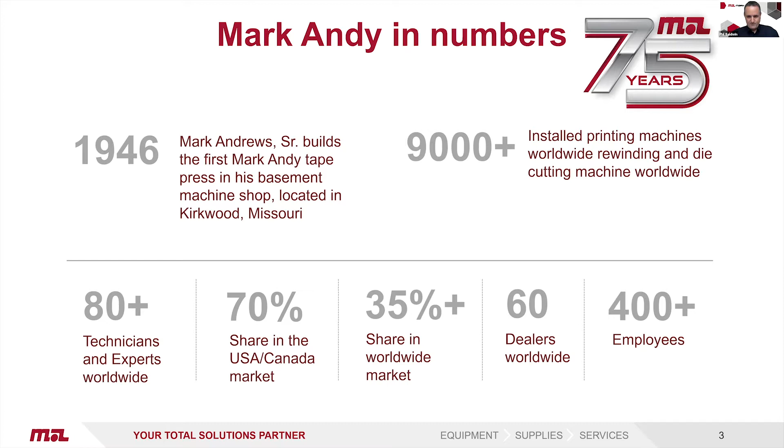We have more than 9,000 presses installed globally. So that's out there in the field running that Mark Andy supports day to day. We have more than 80 directly employed technicians and experts worldwide. In America and Canada, Mark Andy has over 70% of the market share. Globally, we have 35% of the market share, which makes us probably the largest install base throughout Europe and the rest of the world. We have more than 60 dealers worldwide who also have direct engineers to help support the press in the field. And globally as a company, Mark Andy has over 400 employees.

So Mark Andy isn't just a press manufacturer. We like to be known as a total solutions provider. So whether it's the front end, the press, all the way through to finishing, Mark Andy has something to help you. So with this, we have Mark Andy Print Products, which was founded in 2013. This is to offer a complete line of flexo and offset supplies and consumables, such as plate mounting tape, wash up, gloves, cloths, everything you need for your print shop.

When it comes to the finishing side, Mark Andy own Rotoflex. They were established in 1973. Rotoflex have the largest global install base of slitter rewinders. As part of Mark Andy, we can offer this as a package, so you can buy your press and your finishing equipment from us. We also own a company called Presstek. They make the offset DI presses. These are very popular. They're digital imaging sheet-fed offset machines for short run. And then in 2018, we also bought Kluge for the hot stamping, the box making, offline finishing as well for the offset market.

So our vision statement: Mark Andy will be the supplier of choice throughout the entire product lifecycle, offering high quality, innovative solutions that drive our customers' profitability. So we will ensure our customers enjoy doing business with Mark Andy and its associated brands, and want to continue doing business with us in the future. We partner with our customers and provide solutions throughout the product's lifetime. So we're not just a supplier, we like to become our customer's partner in business.

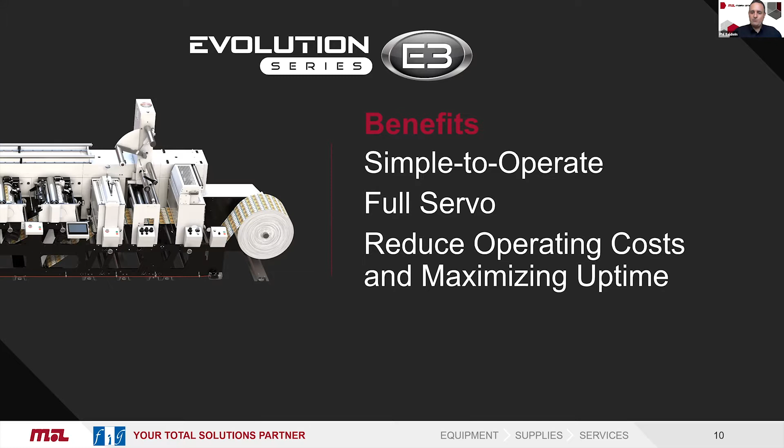So some of the market trends we see: shorter runs. Customers having more variations, different designs, and shorter runs because they don't want to buy hundreds of thousands of a single product when ideally they only need 20,000. So it's market demand for shorter runs but at lower cost. Higher quality labels, so it needs advanced technology, improved registration, improved impression settings and web transport.

And then skilled operators. We're seeing in the market there's less and less skilled operators. So you really need to de-skill the presses, i.e. simplify the presses for ease of use, so you don't necessarily need a more expensive, highly experienced operator or printer to operate these machines.

So with the Evolution, your average waste setup is around 75 feet. For a complete job setup, an 8-color job, you're talking about 20 minutes. It's around 5 minutes to set up the die. This is thanks to the full servo technology, so you have full 360-degree registration. On average, the number of 100,000 label jobs you'd be looking at is about 3,645, and the estimated annual profit margin is around 1.3 million. So that will give you a return on your investment in a very short period of time.

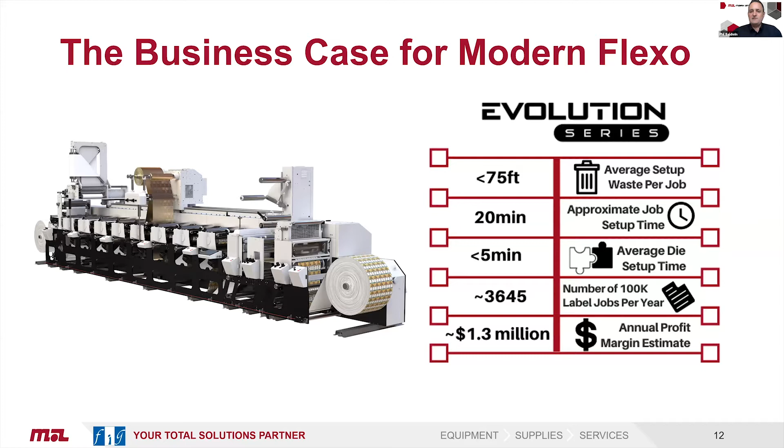Quick overview of the E3. This is the press you see here. Reliable and consistent impression, thanks to the design of the print head with the disc gauge bearer design. So whether it's the operator in the morning or the operator in the afternoon, there should be no variation in the impression. So again, it's de-skilling the press to make it easier to use and more consistent for the operator and owner.

Full servo technology, so whether it's the unwind or the rewind, it's total full servo. Rapid changeovers, it takes about 30 seconds to change over your print cylinders. And then robust converting, the solid platforms. This can be seen from the machines we have out in the field, which are 10, 15, 20 years old.

The higher quality comes from reliable, consistent impression settings with independent impression and inking adjustments, so one adjustment will not affect the other.

Tighter registration control utilizing servo-controlled in-feed and exit, along with an independent plate roll drive, means we can change the speed of the plate roll thanks to the print stations having 2 servos. We also use an Oldham coupling drive - rather than a pin drive system where a pin goes against a pin, which over time wears and decreases register tolerance, we use a male and female slot called an Oldham drive. This prevents wear and increases registration, taking tolerance from an average machine of 5 to 6 thou down to about 4 thou - probably the best registration tolerance on the market.

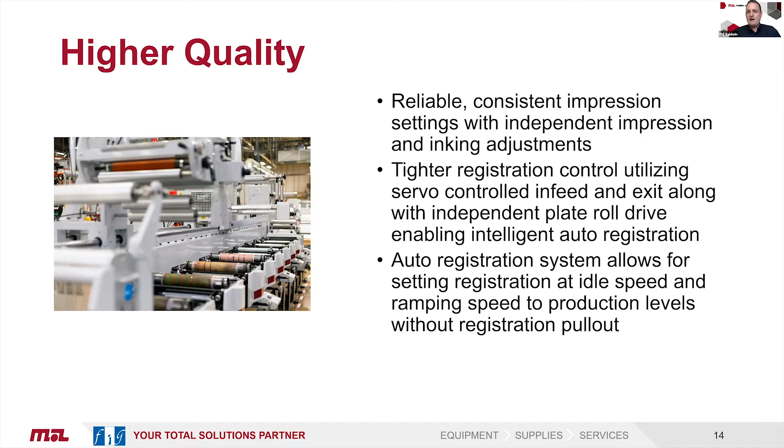We have a new improved web transport system - full servo in-feed and exit, using 24-inch in-feed and exit pacing rollers. This eliminates the registration movement you'd see on a normal label press, which only has 8 or 12-inch in-feed impression rolls. The auto registration system allows setting up register at idle speed, then ramping up to production speed without seeing registration pull out, thanks to this improved system.

We have an enhanced pre-registration system that automatically puts the plates in position with the first print down. This will be as accurate as your plate mounting.

Fast impression adjustments during material changes with completely independent material impression adjustment means any movement of the plate won't upset the web transport, which can cause misregistration on the units following the one you've adjusted. The load and lock inking system gives 30-second changeovers, and servo controlled die stations with auto register ensure your die station stays in register throughout production at faster speeds.

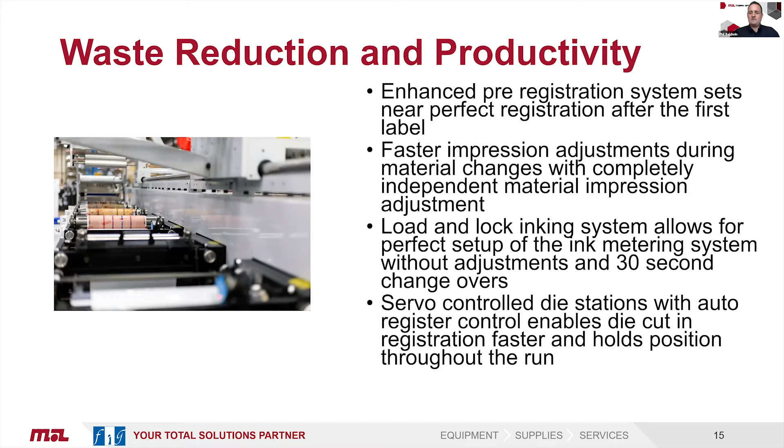So really the roundup is the E3 is full servo technology, extremely easy to use. You have reliable impression and die cutting, rock solid registration thanks to the Oldham drive and improved web transport, and much faster changeovers than other presses. The machine also features a new UV system called Pro UV.

It's a very energy efficient system compared to other UV systems or older systems on the market, with the power supplies having a power factor of up to 94%. Older systems are most likely around 60 to 70%, and more modern systems are probably still only in the 80s, so 94% power factor is extremely high.

It has fully adaptive ventilation control, allowing for greater temperature variance to keep the lamps at optimal temperature in every environment. Some systems can suffer if they're in hotter countries, for example India, but thanks to the Pro UV system and its controls, it controls the temperature depending on its environment - so it's suited to extreme environments, unlike other systems.

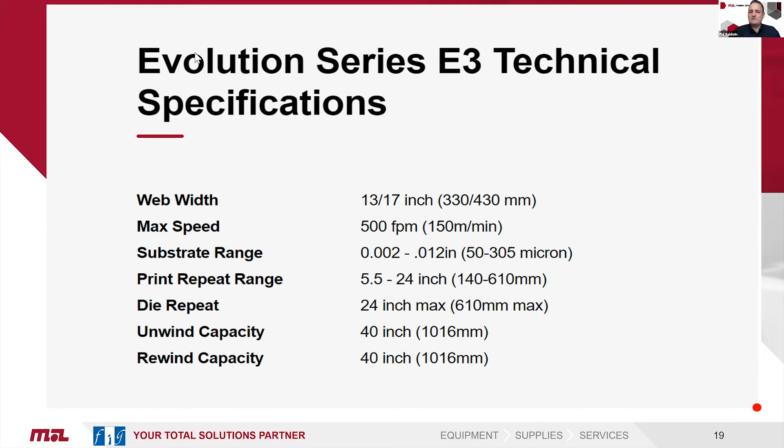Could you give Lucas a... Yeah, I will check what is going on. I am sorry, I am okay. Here, good, sorry, I was muted.

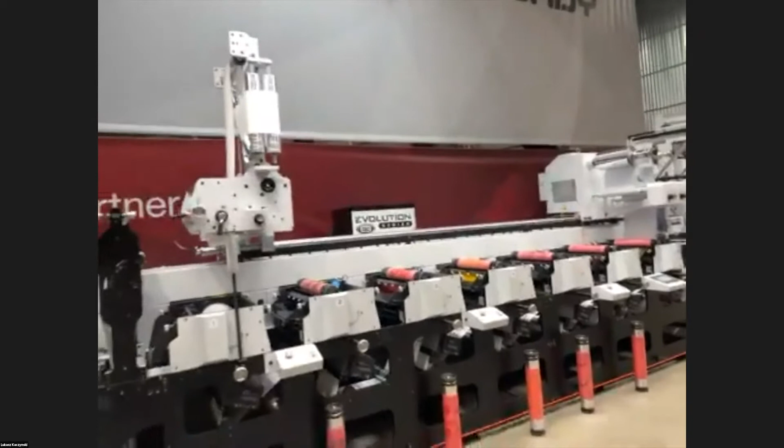This is how the machine looks. It looks very similar to the Performance series, and it's also built the same way, more or less. So we are starting with the unwinder.

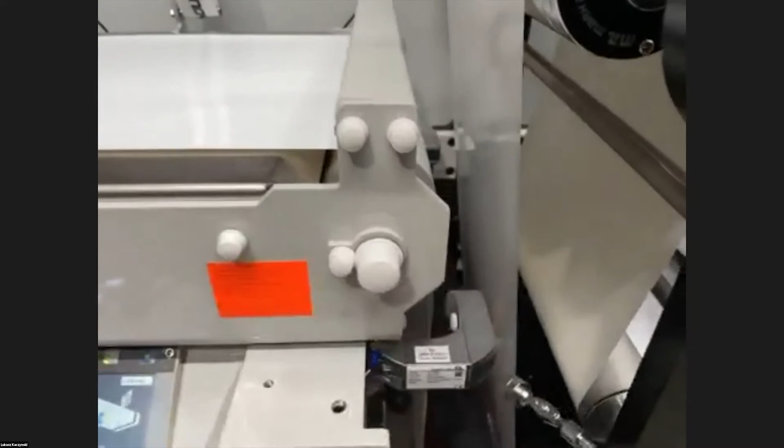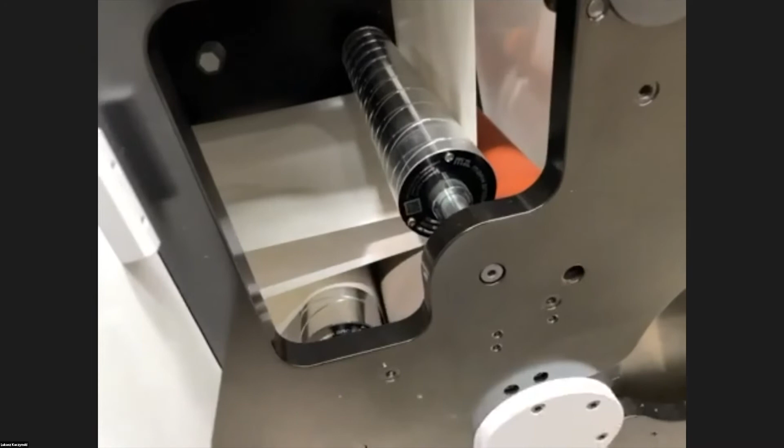We have a splice table and ultrasonic web guide, with sensors from two sides. We have in-feed pacing, which is servo driven. We've got a big pacing roll and one rubber nip roll. This pacing roll is the same diameter as the impression cylinder in the printing stations, which is why we're able to hold very good web tension in the machine, and because of that, the registration holds really well.

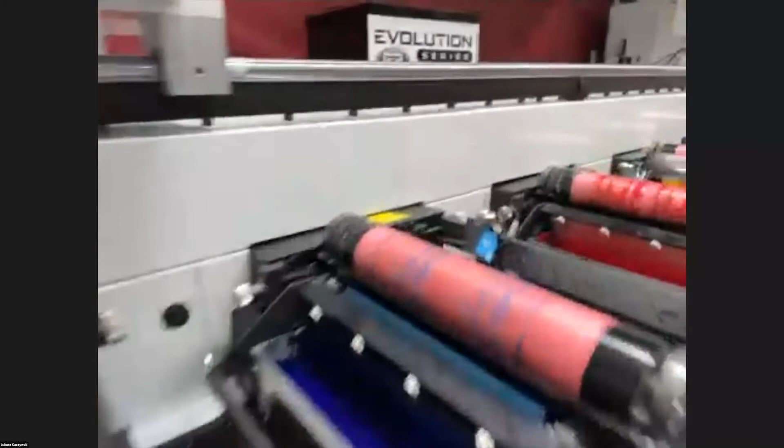What's very important in this machine is that we don't have any shaft. It's all servo driven, and we have two servo motors in each print station. One servo motor drives the impression cylinder, and the second one drives the print cylinder. Maybe later on I can show you how it looks on the backside of the machine.

Over here we have a delamination module. So when we want to print on the glue side, we split the face and liner. The liner goes up, the face goes to the print station. We print one color on the glue side, and then it goes to the relamination module, and we have a web turning bar.

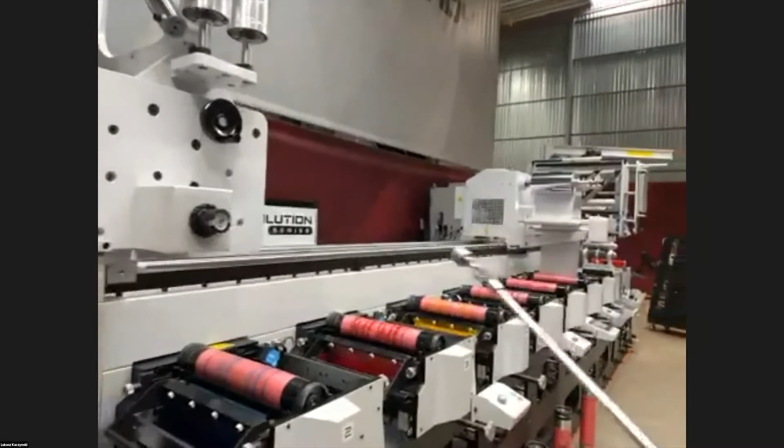What's very important to add is that we have a rail system through the whole machine, so we can easily move all the equipment on the rail. We can move the web turning bar to other print stations or a cold foiling unit. We can also have a laminator on the rail, or in this case, a peel-off module. So everything is on the rail.

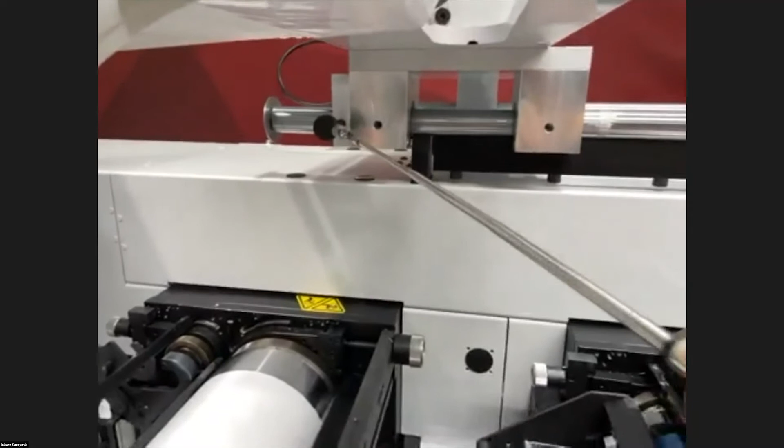A small difference from the Performance series is that the locking knob is in the front, on the operator side, so the operator doesn't have to go to the rear side of the machine anymore.

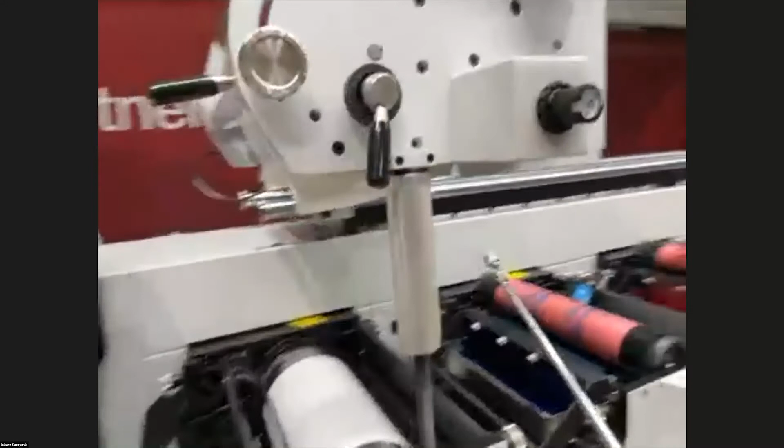We also have a support bar for all the equipment, which has two functions. It supports the web turning bar, but also, for some substrates, you need to change the level of the web turning bar a little bit. You can easily do this with this screw, and then it goes a little bit up or down.

E3 is available in a configuration of 4 print stations or 8 print stations only. This machine has 8 colors and is 330 millimeters wide, which is 13 inches.

The print head is exactly the same as the Performance series. So we have the ink tray with meter roll, the doctor blade, the Anilox roll, the plate cylinder with the plate, and the impression cylinder.

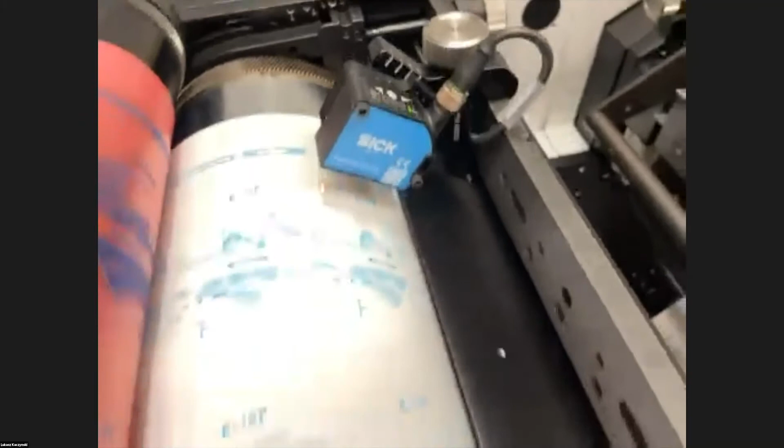All the colors work in automatic register. Over here we've got a sensor reading the master mark from the first print station, the master station. And over here we've got the pre-registration sensor, you can see the red light. So when all the plates are mounted the same way, the same position, and we're setting up a new job, you just need to make a small final adjustment and the colors will be in register.

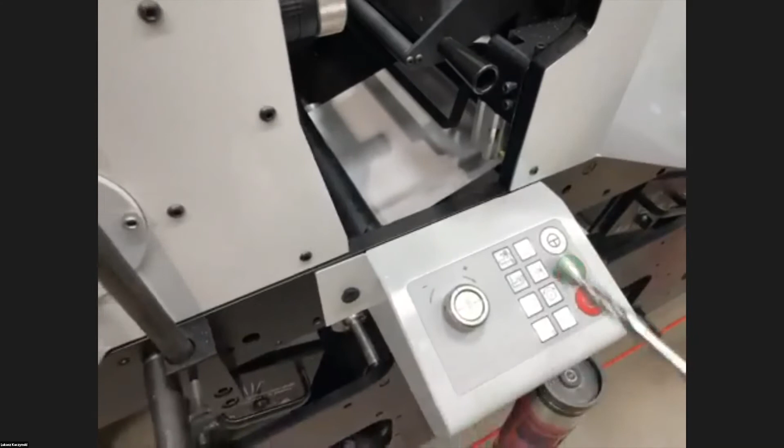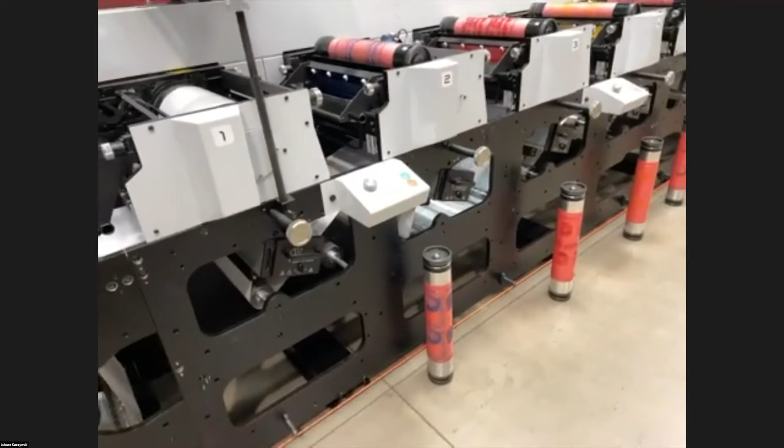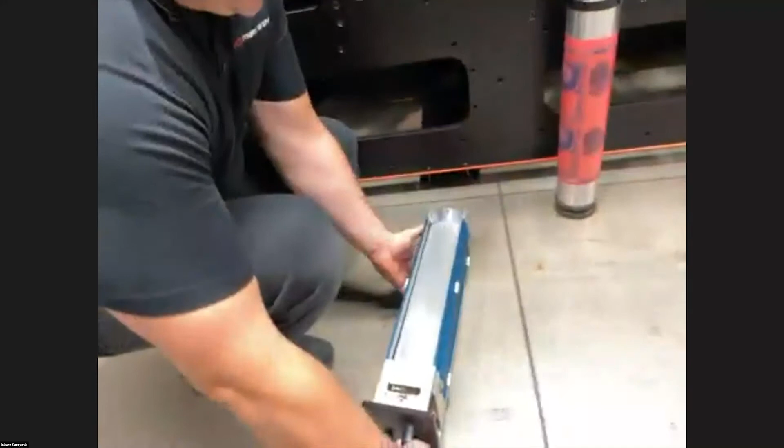In this machine, Evolution E3, we are using the Pro UV system. That's how it looks, one UV cassette, 160 watts per centimeter power. Grzegorz, could you please take one cassette out? So it's very easy to take out, you've got only one knob, you need to turn it, and it's out. Very easy to maintain and clean.

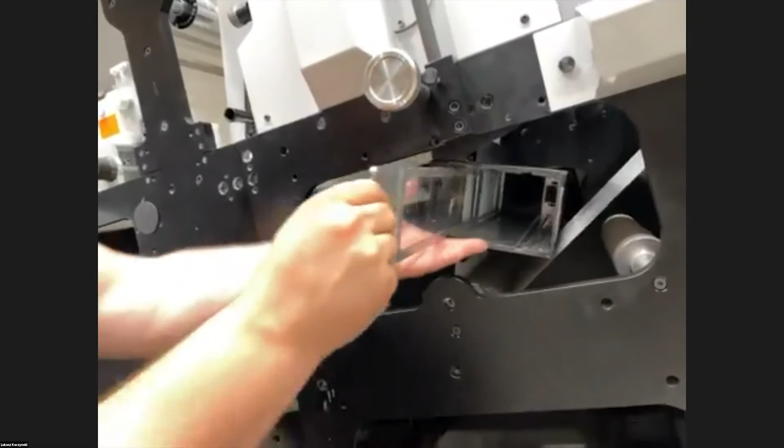It's also very easy to take out the protective glass. The protective glass has two functions: it keeps the bulb clean, and it also limits the heat created by the UV lamp, so you don't get that much heat on your web, on your substrate.

It looks very user-friendly, Lukasz. It is, it really is.

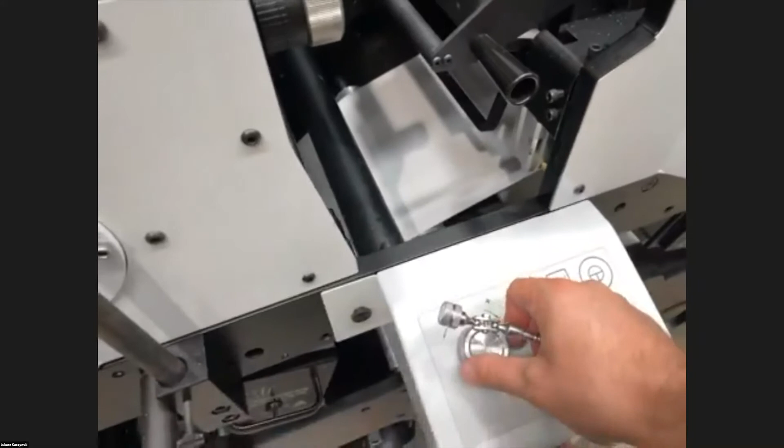This is the registration knob, 360 degrees. If you want to go forward, you turn it to the right. If you want to go backwards, you turn it to the left. And this is the side-to-side registration.

All the print stations look pretty much the same. The only difference is the last print station, which has a longer web path to the UV lamp for better spread out of coatings and varnishes.

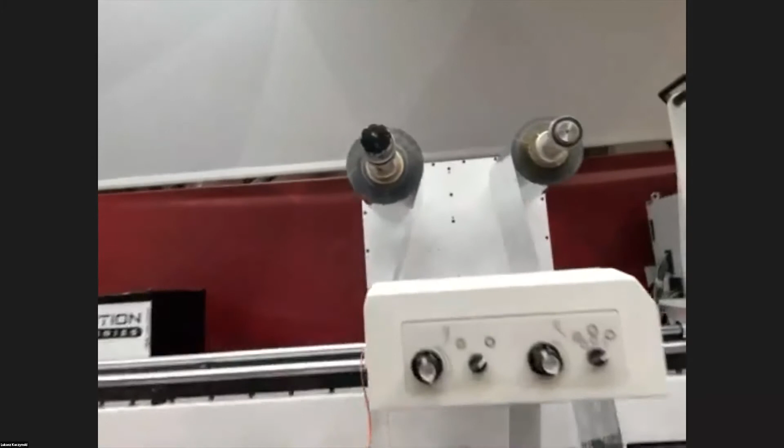Over here we have a cold foil module, unwinder and rewinder, nip roll, very easy to set up and also very quick to move from one print station to another, as you don't need to change or add any idlers.

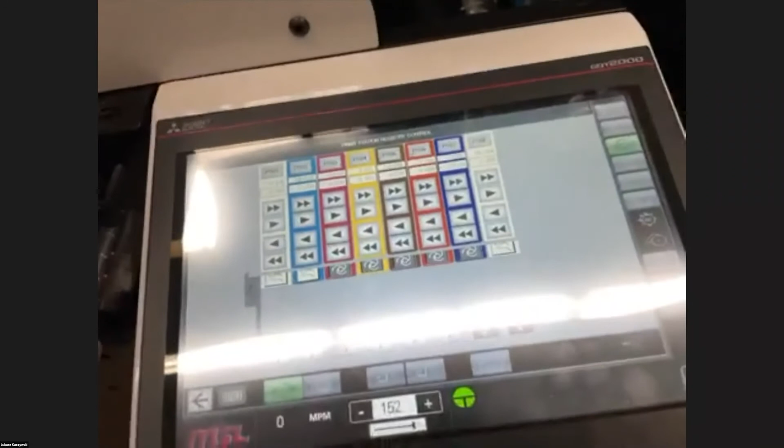This is the main control panel for the operator. You can move the registration backwards and forwards from this screen as well. We also have a vertical die cut slot.

Waste removal and hoist to swap the magnetic cylinders.

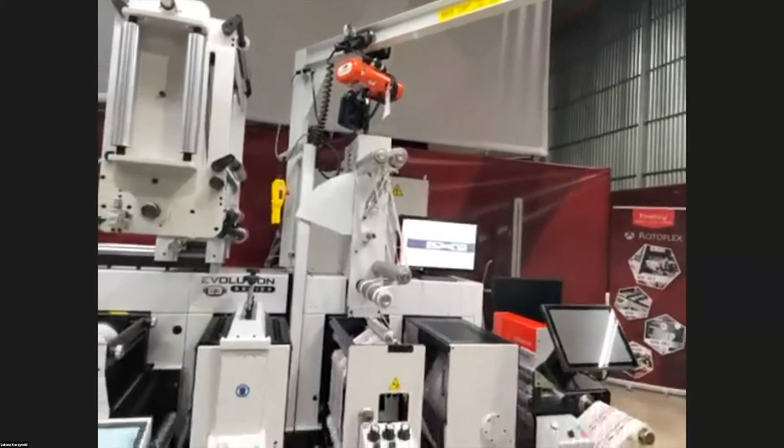Again, we have exit pacing. So one we have in the beginning of the machine, which we call infeed pacing, and over here we've got exit pacing. It's a big pacing roll, servo driven with rubber nip roll, which controls our web tension in the machine.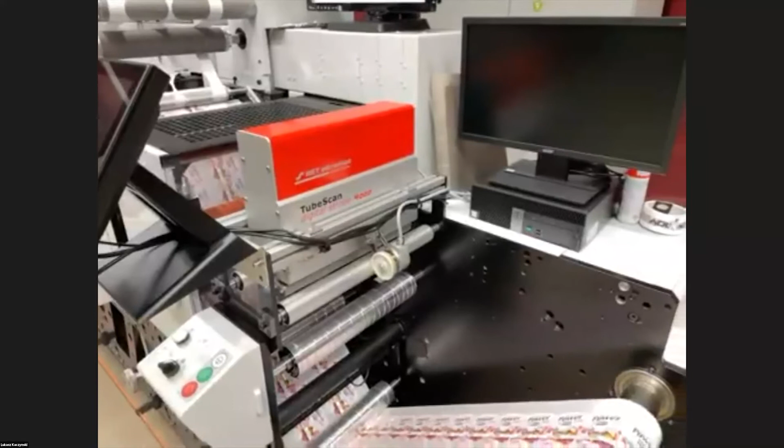Over here we have the BST eltromat 100% inspection camera. We can also add EyeC or AVT, it's up to customer wish what kind of inspection camera we use. At the moment most printing houses are printing labels above 120-140 meters per minute, and with this speed it's impossible to control quality by eye, so most companies, in Europe at least, are installing and investing in inspection cameras.

And over here we have a rewinder. So that's how the machine looks like.

From the front side and on the rear side, it's quite simple and easy. So we have the main power cabinet, we have the UV system extraction, that's the blower basically. We don't have ducting in the demo room, that's why the big black box does the ozone filter.

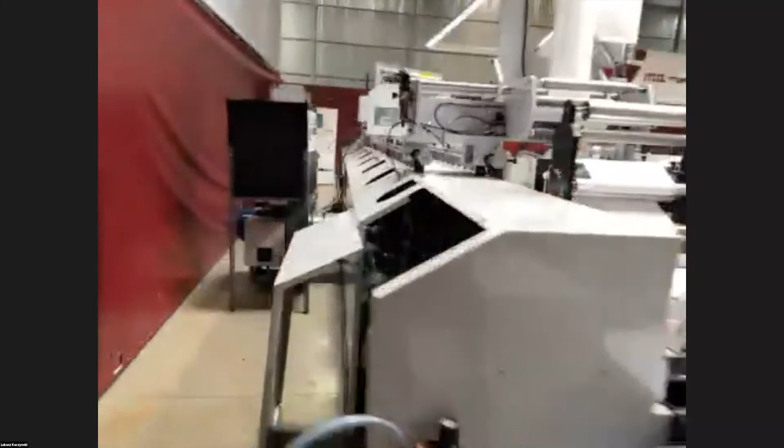Maybe I can show you one print station from the back side, so you can see that we have two servo motors for each station. They're made by Mitsubishi, very reliable, strong servo motors. Over here we have one for the print cylinder, and over here one for the impression cylinder.

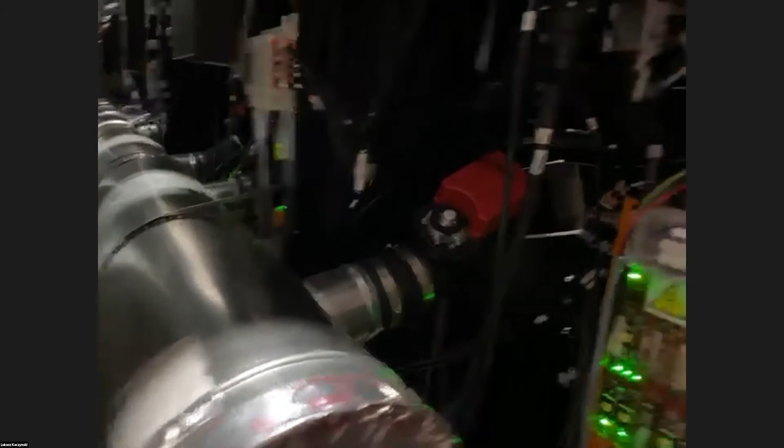This is the integrated power pack for the UV lamp, we have one for two lamps, and this is the ducting system for all of the UV lamps. The machine has been built in quite a simple but robust way, and later on it's very easy to maintain and service this machine.

Okay, do we have any questions, or will we have questions at the end of the demo? I think maybe Lukasz can just talk about the system you have on the rail after the cold foiling unit.

The peel-off module, you mean? Yeah.

Sorry, I couldn't hear you, it's quite noisy in here. So maybe we will have all the questions at the end.

Well, that's fine. I just wanted you to explain this module, because I believe you're not really running a job with the peel-off module, right?

Yes, that's correct, we only have this for testing right now, but it's quite simple and easy to use. So we're webbing the web to the upper side, then it goes to the lower one, you're splitting one web, it goes to the turning bar from here and goes to the turning bar in here, and you're putting two webs on top of each other.

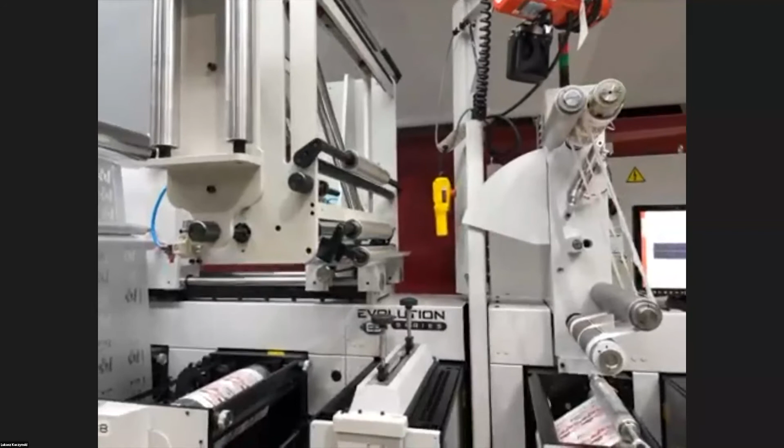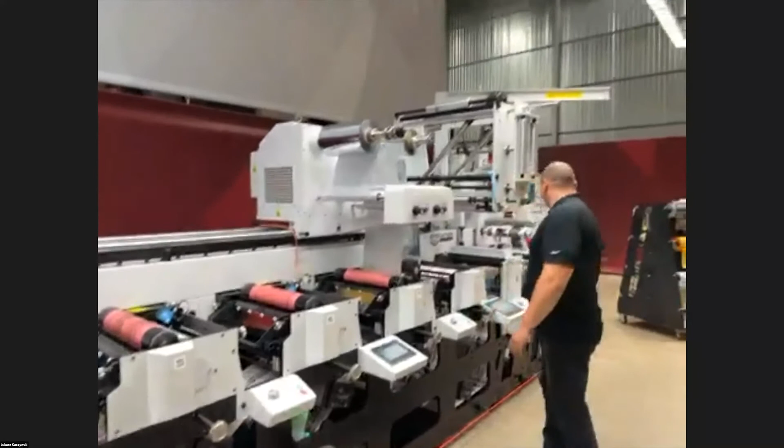Okay, so let's start the demo. For today's demo, Grzegorz prepared two jobs. One job is CMYK plus Pantone plus cold foiling and die cutting. The second one is CMYK plus Pantone and die cutting. So let's see how the machine is running.

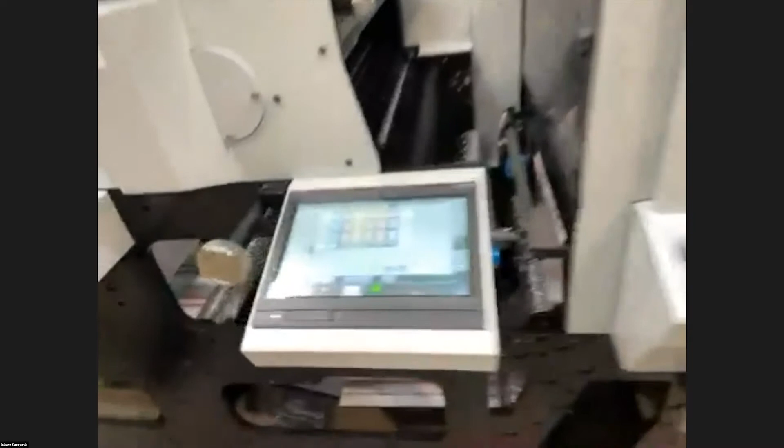We are running at the moment the maximum speed of the machine, which is 152 meters per minute. Let's check the registration. Registration looks very good. Let's adjust a little bit backward.

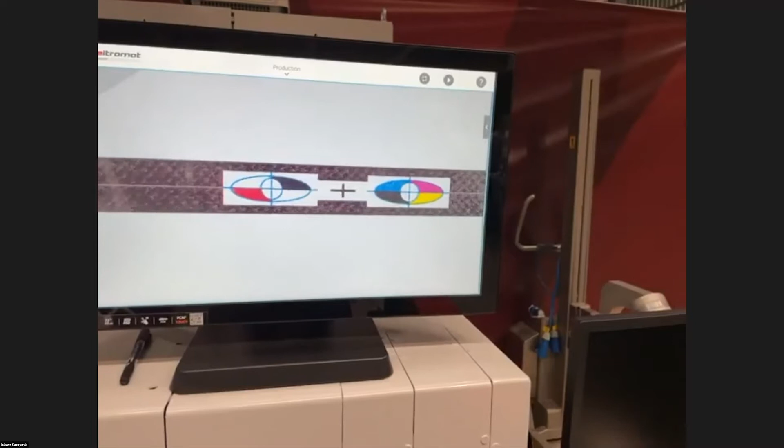I can't see that it's moving at all, and we are running 150 meters per minute.

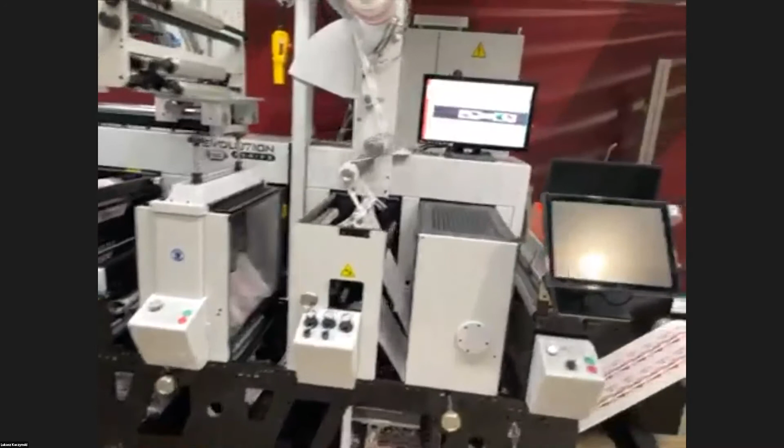So Grzegorz has stopped the machine. Let's start again with the same speed and check if the registration will come back in the same place.

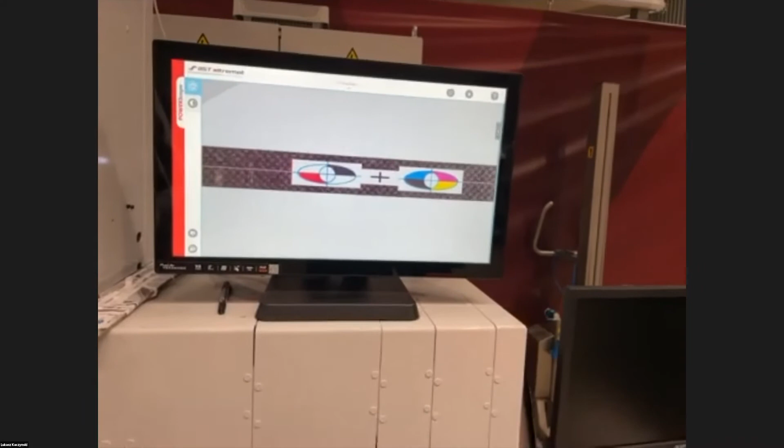So you can see that when the machine starts, the registration was a little bit off, but now it's exactly in the same place. So when you are changing your roll or stopping for one reason or another, you don't need to adjust the registration.

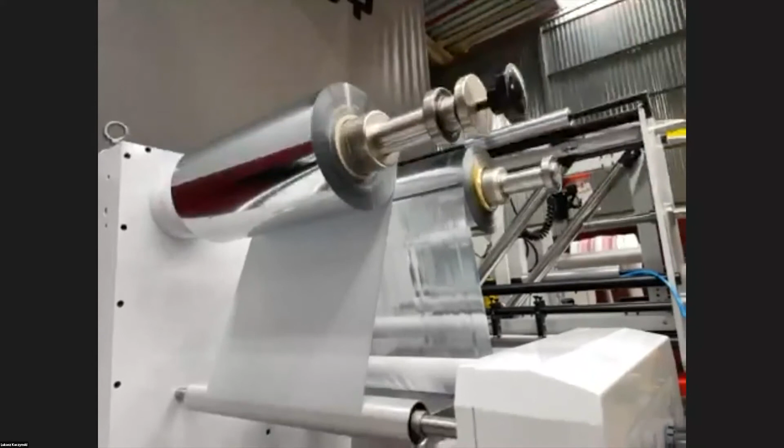So we are printing a master mark on cyan, and all the other color print stations are following the master mark using six sensors in here.

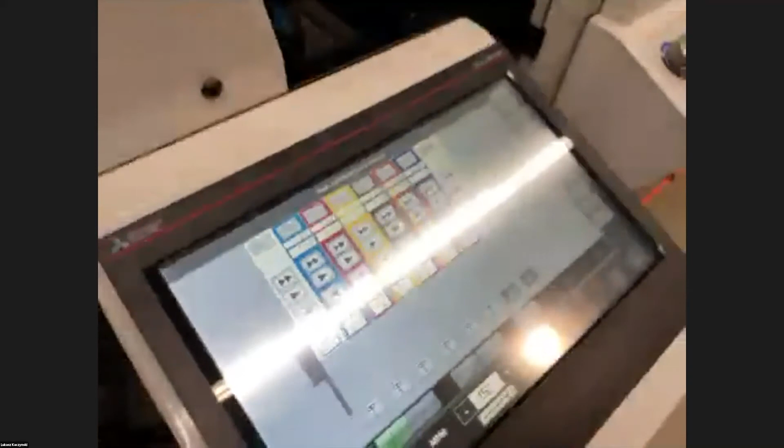Also, maybe we can show manual mode. Let's swap from automatic mode to manual mode in registration and see what happens. So now all the colors are in manual mode. Starting registration as well, good.

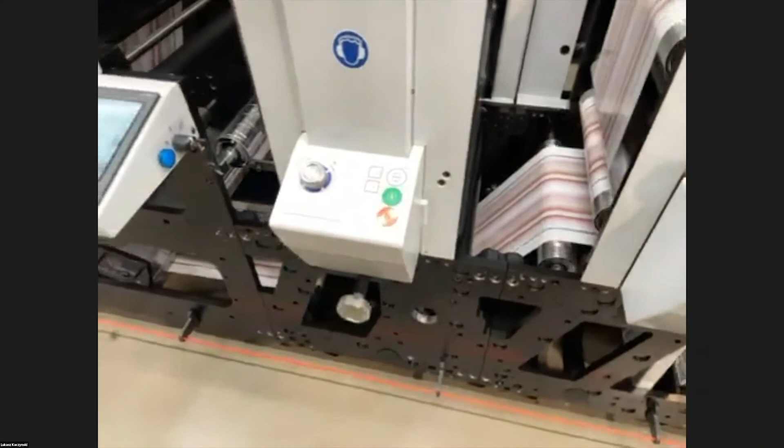So let's start and stop with manual mode. Just to confirm, we have everything in manual, and let's start again and see if the registration will come back.

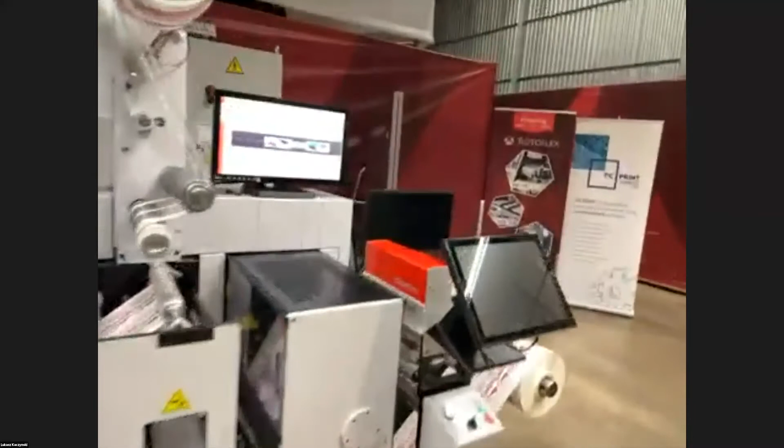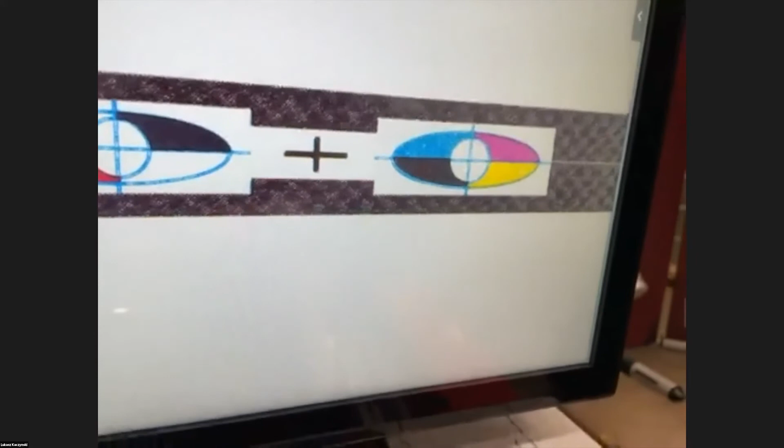Grzegorz was a bit afraid, but even in manual mode, it comes back in the same position. So whether it's manual or automatic register, it's holding registration perfectly. And the substrate in the machine is PP white 50 microns with glassine liner. So let's start changing the job.

So Grzegorz is removing the cold foil, taking out the print cylinder. What's very important is that our machines have very easy access and are operator friendly. So if you want to swap the cylinder, you just need to hit one button, take out the cylinder. You don't have any guards, any covers. You don't need any special tools. Just one button, taking out.

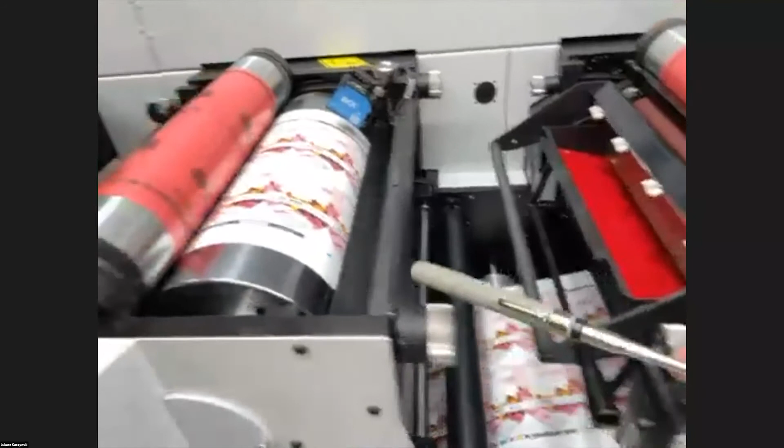Also, when you are changing from one repeat to another, from big cylinders to small cylinders, and you are running similar thickness of the substrate, you don't need to play with the impression adjustments. So over here, we've got knobs for the impression adjustments, but when the substrate has similar thickness, you don't need to change it because of the design of the print head, the print station. So the cylinder is lying here. So it doesn't matter if it's a big cylinder or small, the contact point is always the same.

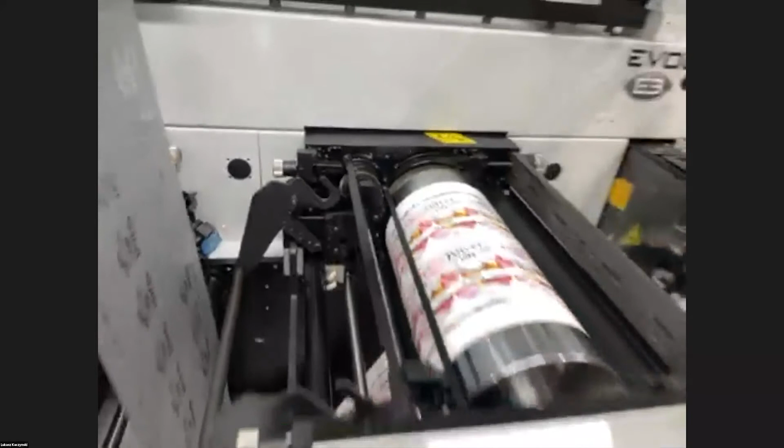Okay, so we are starting another job. Grzegorz just hit the impression knob button on the cyan. We are printing a master mark on cyan, over here. Then this sensor is reading this master mark. Grzegorz hits the pre-register button and it's almost 100% in register. Just a small final adjustment.

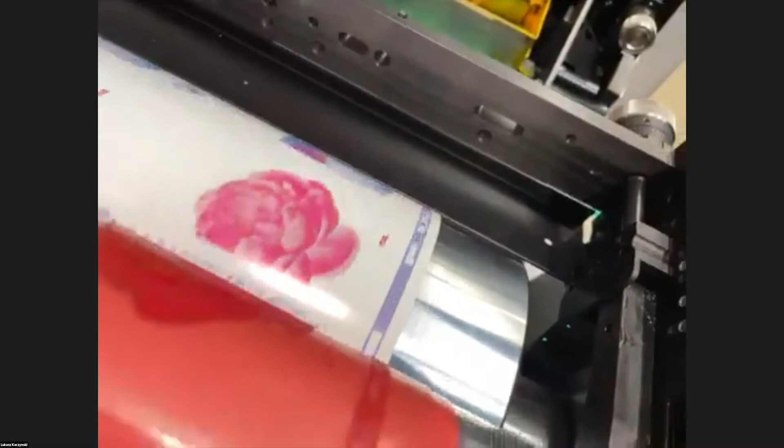Same story with another print station. So reading the mark, hitting the pre-register button, final correction, and moving to the next one. Okay, up to the next one. Okay. Now the die cut.

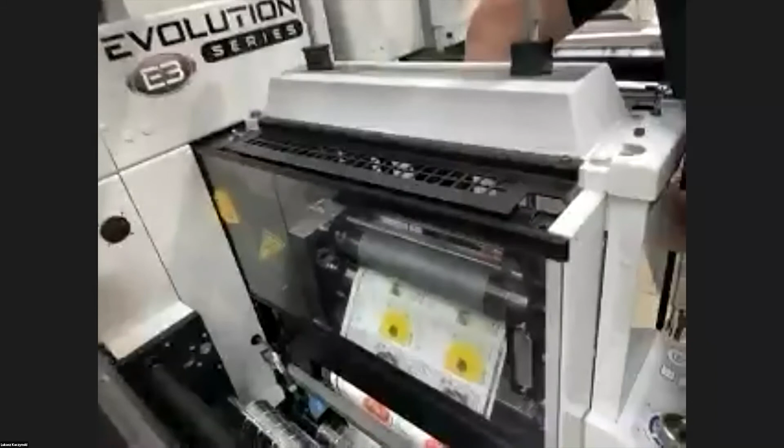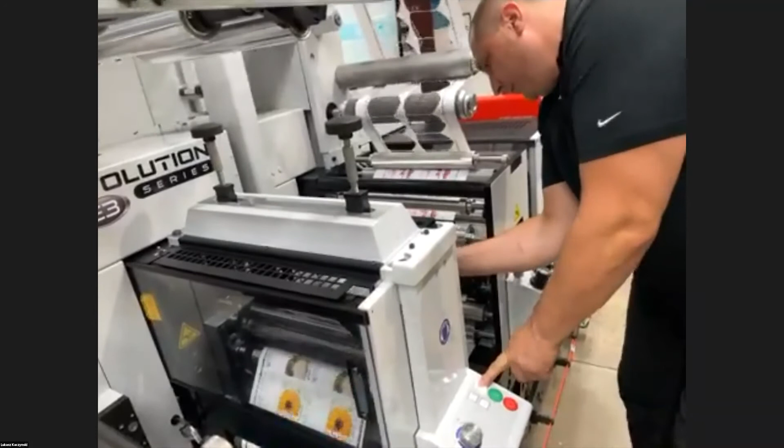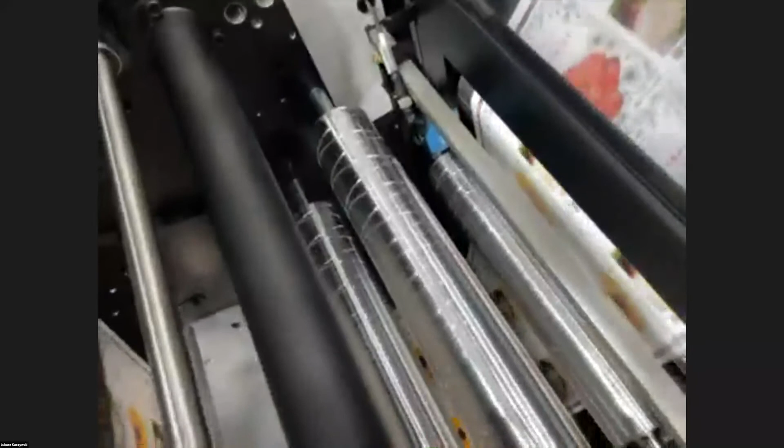Now we will be swapping the flexi dies. Get the flexi die into register. Same story, automatic register, the sensor is over there. We can move it backwards or forward using this knob, or we can change it on the screen.

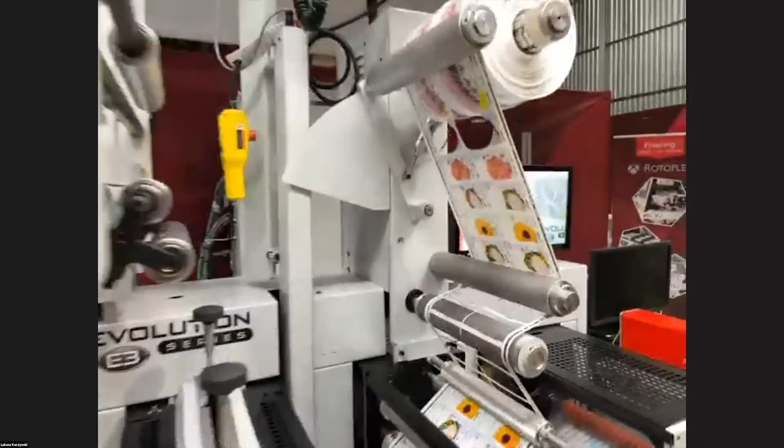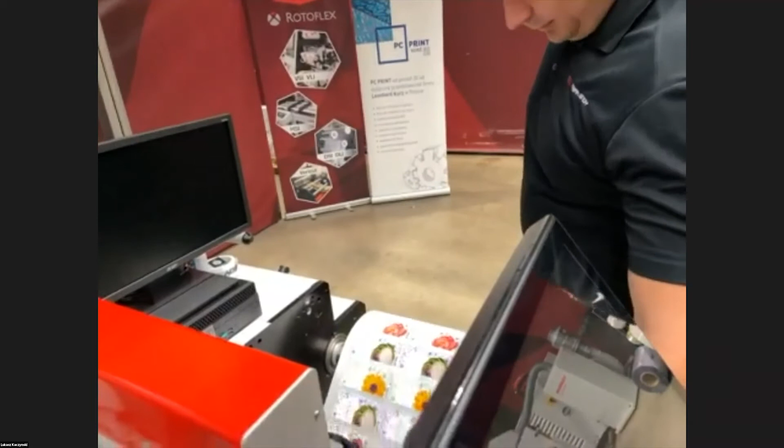So to remove that last job, Lucas, take the whole job off in the cold foil, put the new job on, print to print register and die cut. You're about just under 8 minutes. So that's pretty impressive really for a complete job change. How many minutes, sorry? I said just under 8. I think it's actually closer to about 6 minutes, sorry. Yeah, that's quite normal for this machine.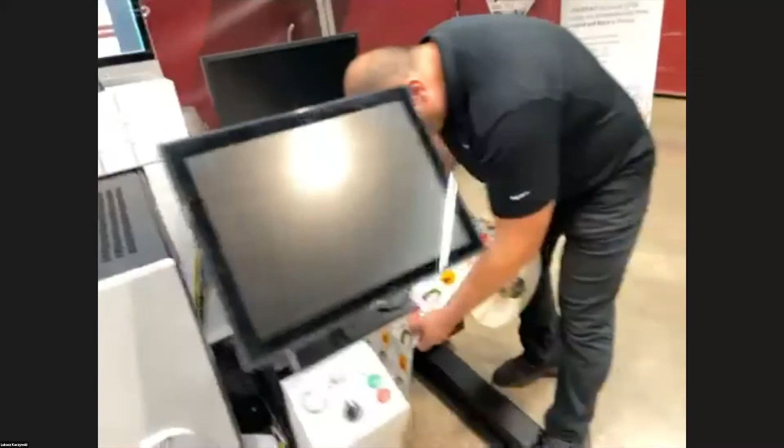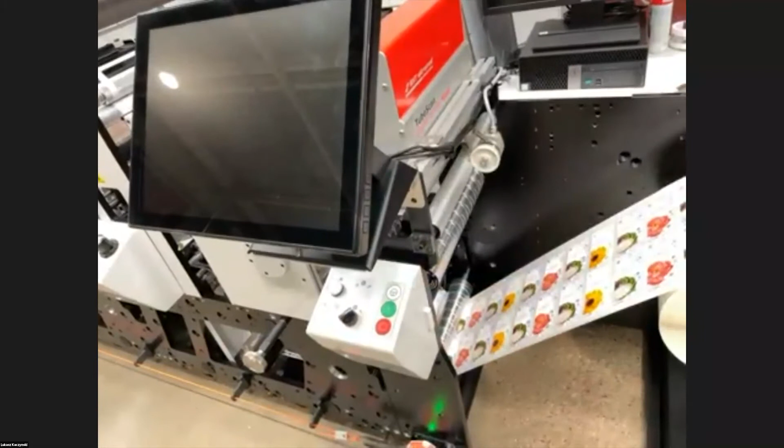Let's check how much waste Grzegorz produced by setting up a new job. So we started to print somewhere in here. Then we set up all the CMYK colors and Pantone and removed the waste. And it's all in register, acceptable to start the production. Can you do it again and make it shorter? Shorter than 1.5 meters might be difficult, but I will ask Grzegorz next time to do this better. Great job. Okay.

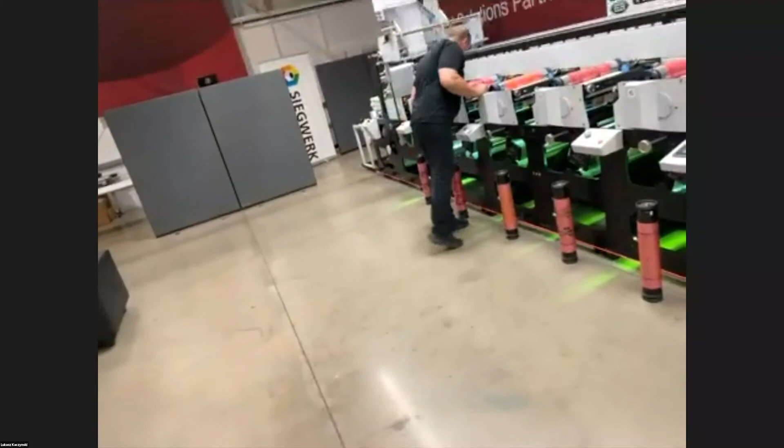Okay, let's come on to the production speed. Production speed for Grzegorz is always the same, 150. Small correction in the registration, side to side. We are running now 70 meters per minute. Now we will run 150.

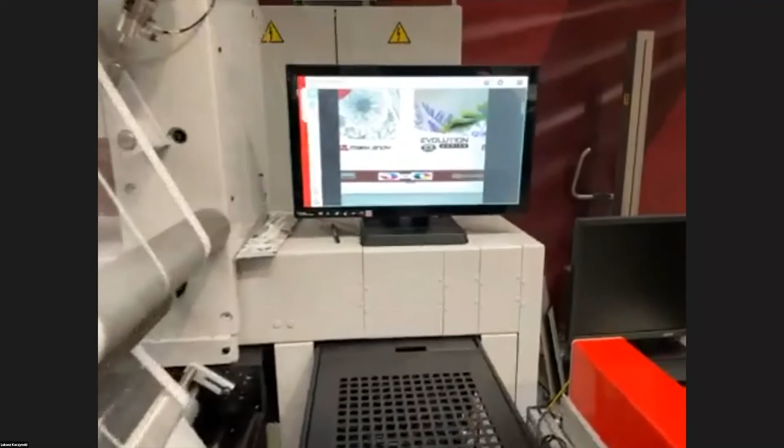How many colors is this job, Lukasz? 5 colors here. CMYK colours and 1 Pantone. So a pretty average label job then. So quite a true reflection. So we are running 150 and register is spot on. Okay, so let's stop for a moment. Really nice. Let's check the label.

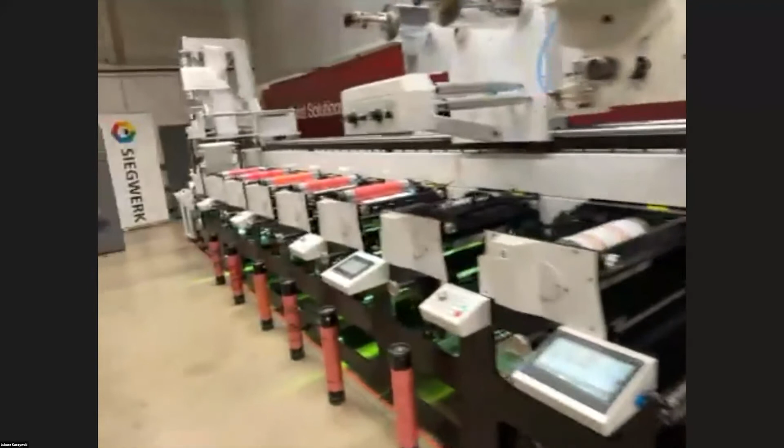Okay, let's start again and check the registration. So normally on a mechanical press, due to web transport, the registration moves completely out. Just one length of the press and register is back on. It's absolutely minimum waste. Stop for a moment.

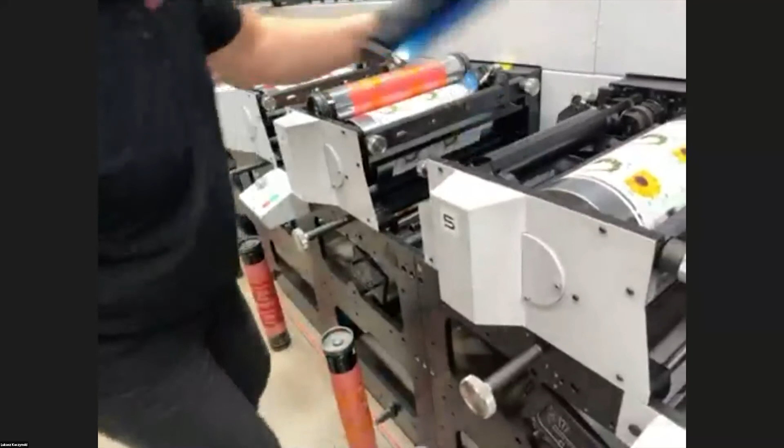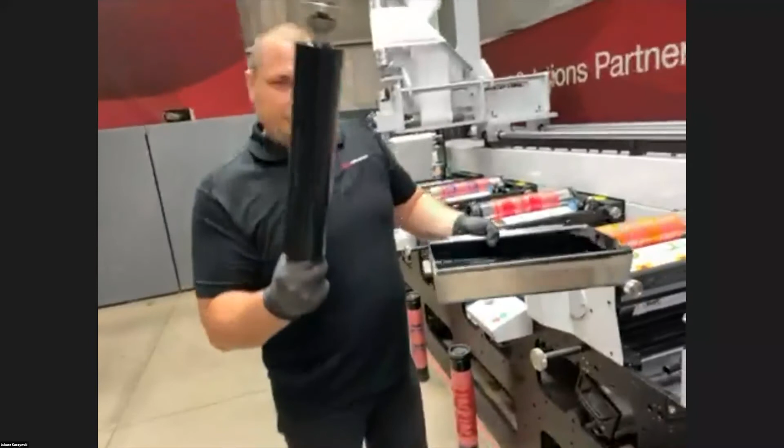Okay. Now we would like to show you how easy and quick it is to change from one color to another. So we'll take everything out of the print station and put it back in. This shouldn't take longer than 30 seconds. So open the print station, take out the print cylinder, take out the doctor blade, anilox roll, and the ink tray. That's all. Print station is ready to print.

Okay, perfect. I think that we answered all questions. Phil, Gaurav, did you receive any questions on private message? So there's actually one: does the machine support the QC-DC? The E3 only actually runs the vertical die slots. It's designed, being a label press, for your longer runs and your longer setups. So your longer runs rather than multiple changeovers, which would require QC-DC.

But as you saw during the video with Gregos, it's actually extremely quick to change over your flexi die, or you could look at having two vertical dies. So you can have one station running and then the other one with your next repeat size already in. So when you stop the machine, you can lift up the first die and then just mount the second die to get going. So changeover time's still very quick on this system. The QC-DC though is available on the E5 if you were to look at that model. Okay, perfect.

What I can say is that we have done installations. If I talk about the Performance Series, today we have more than 50 machines within India. But one of the things is that we have not yet installed even one QC-DC. I would love to do that, but the operators are smart and they are getting smarter and smarter, and they could manage with the vertical die cutter station. But QC-DC is an investment, which is possible on the Performance Series presses, not on Evolution.

Just one final question. It's asking if the machine comes with the advanced waste wind-up. That is also an optional extra, I believe. I'm 90% sure it is, but yes, I do believe that is an option. Really, it's to do with what we call the IOs, the inputs and outputs. So yes, the advanced waste wind-up is possible.